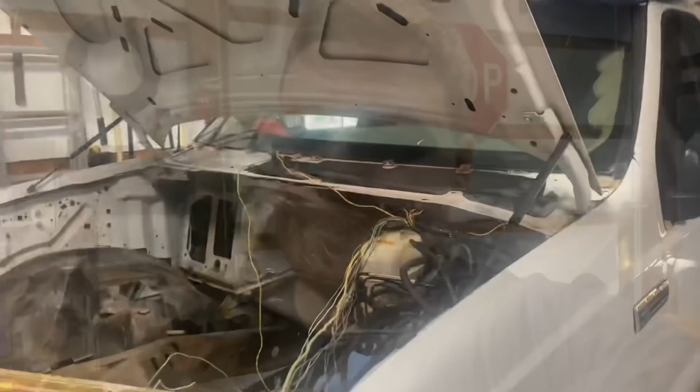Let's jump into it. So the race truck here, we're kind of prepping this thing, getting it ready for our engine, which is currently at CNC fabrication. You can see we've eliminated basically everything in the HVAC system, so your heater and AC, everything is eliminated over there. We're doing some wiring, eliminating a lot of the factory wiring needed for all that stuff, so we're going to have as little wiring as possible going across our header panel. I did make some small modifications up here to hopefully make it easier for engine removal and installation, not that we're going to be doing it a lot.

Inside of the truck, it's still the factory interior, but we did pull the dash off and got rid of all of our ductwork back here. And I think that was pretty much it. Back here we still need to do some work, this place is a mess. But you can see over here all of the components that we've deleted.

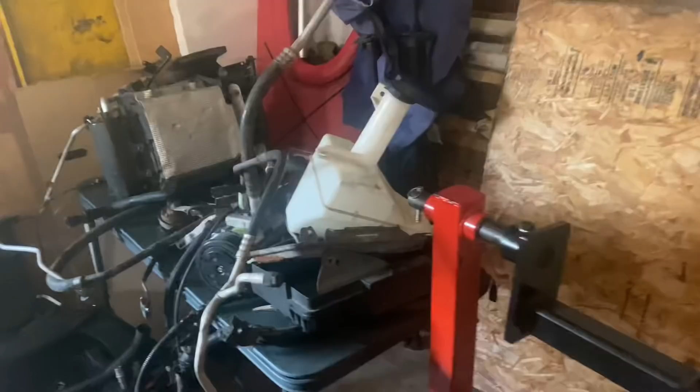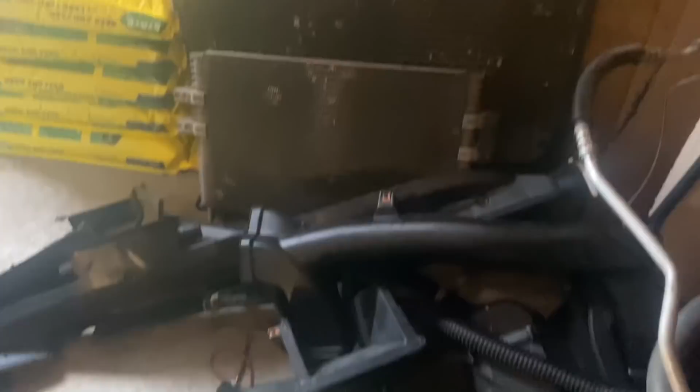Our windshield washer fluid, gone. See you later. There's our heater box right there. Here's all of our vents sitting behind our dash there. We've also got our AC condenser and our transmission cooler, because we're going to be going to a fan setup that's actually going to be in the back here, so we don't need all of that up front.

But guys, this is quite a bit of weight. There were some miscellaneous brackets that we were able to eliminate as well. Oh yeah, these puppies, gone. See you later, don't need those. Vacuum pump, not gonna need that. Whatever, but yeah, quite a bit of weight.

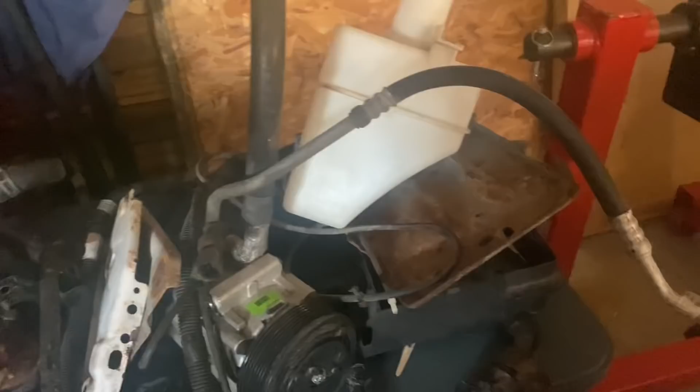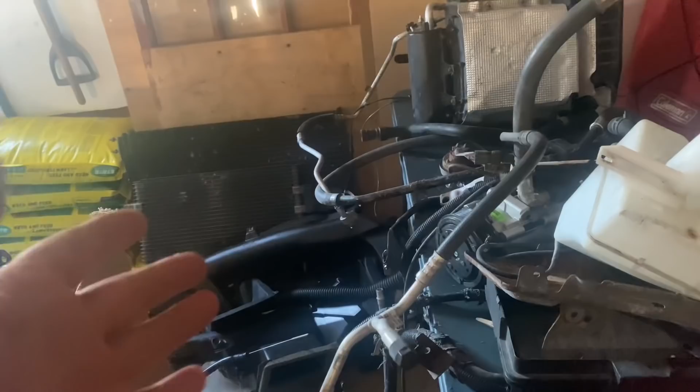We've got both battery boxes as well, those are removed because, again, we're moving our batteries to the back. We're trying to eliminate as much weight as possible, but stuff we need to keep, like our trans cooler, like our batteries, that weight we're going to try and move to the back of the truck, because obviously there's zero weight back here. So that's kind of the goal, at least moving a lot of the weight that's on the front end and getting it back here, while also eliminating weight along the way.

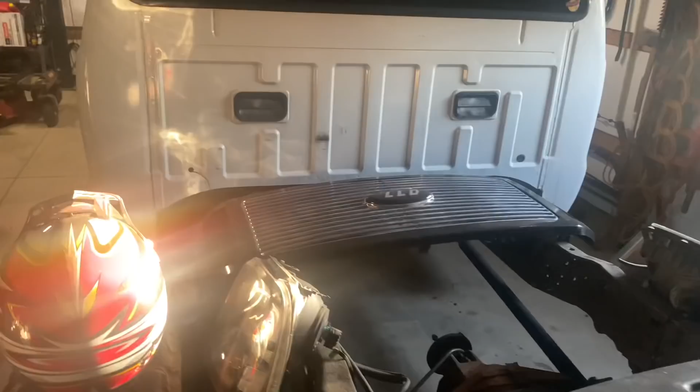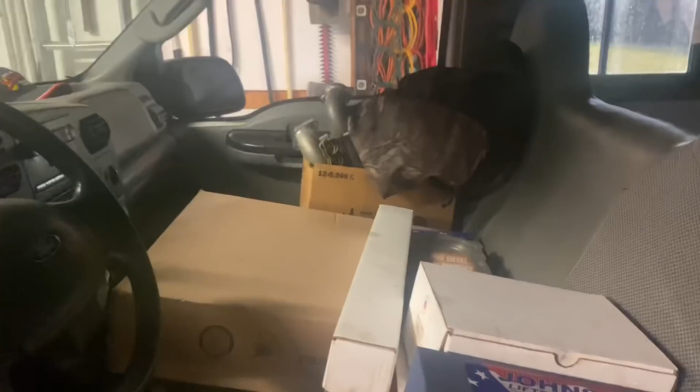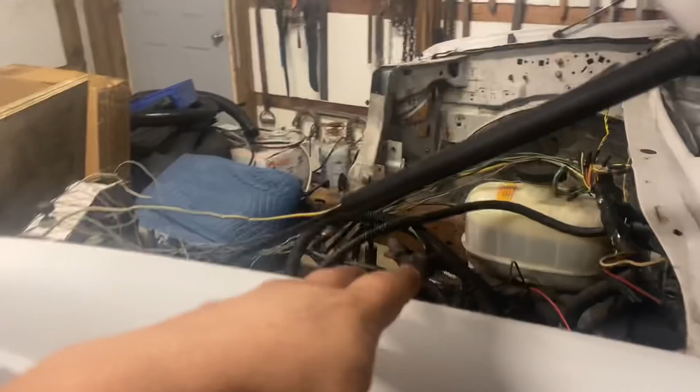So the goal here is to be under 5,000 pounds. Careful, whoa, hey, careful. So we're trying to keep the interior somewhat relatively stock. We're going to be going to racing seats in here, might do something with the steering wheel. I don't know how I feel about airbags just yet, but we might be eliminating the airbags as well. ABS, we're keeping. Like I said, not sure about the airbags yet. So a lot of this stuff over here is going to remain pretty much the same, but a lot of the weight came from that side of the vehicle.

So yeah, pretty gnarly. I didn't feel the need to pick up the camera and show you guys me just blowing this thing apart and ripping and tearing things out of the truck, so I just wanted to do a short update for that. We're getting really close, guys. You guys, oh my goodness.

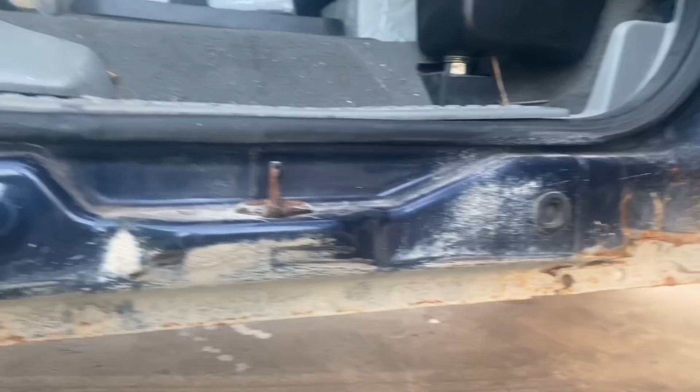Rust isn't terrible, but there's definitely some rust. Cab corners were cut out. It does have a rust-free Texas bed on it though.

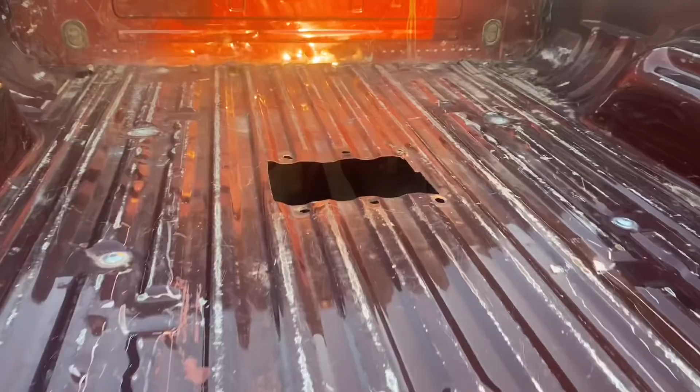Obviously it's the wrong color, so that's kind of nice. It's got a gooseneck plate. The bumper is actually in really good shape, just missing a couple of these plastics. So that's not too bad.

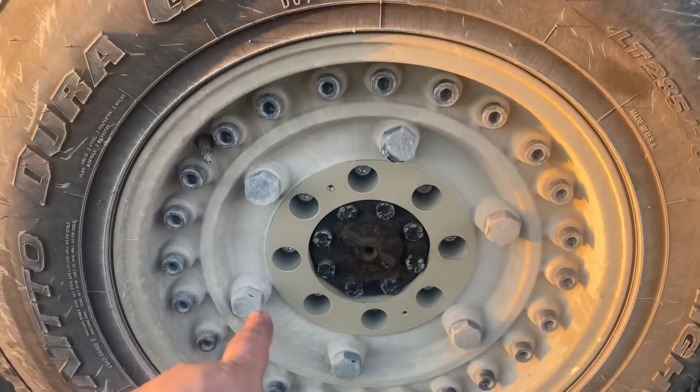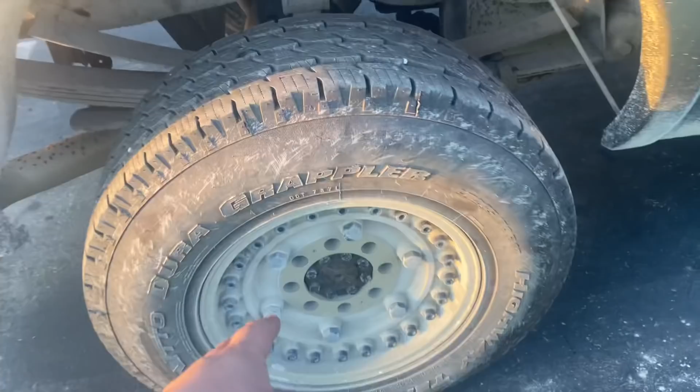The rims and tires are brand new, from Black Rhino wheels, and they're Nitto Dura Grappler highway terrain tires. Brand new rims and tires, this is like a $2,000 setup. This bed is like $2,500 here in Michigan. So that was pretty cool.

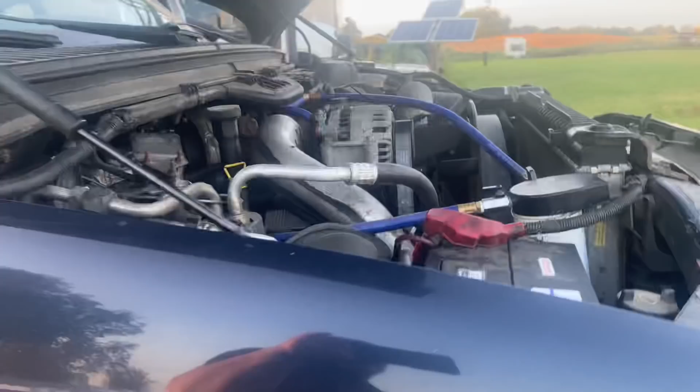It does have the lights and the mirrors. Here is underneath the hood. You can see he's got his coolant filter, that's routed all weird. And then it's missing this front plate here, or fan shroud portion right there. But it does have a coolant filter.

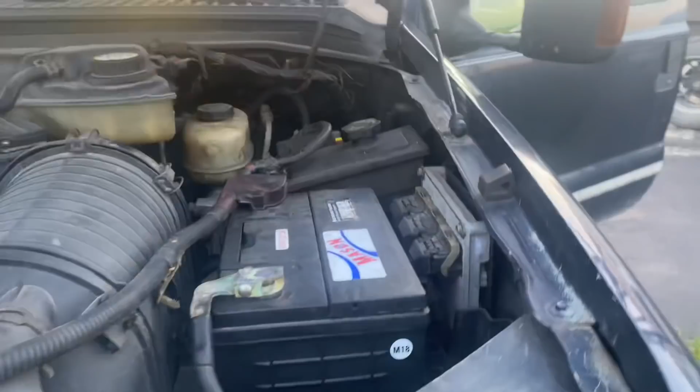We do seem to be losing coolant. We are also leaking oil, but if you look down there, that is a stud, so somebody did head studs in this. Look at that, nice bolt right where the filter minder goes.

'03. When we bought this truck, the guy told me that it did not run, which the batteries were dead. So I hauled it back to my place, and the first thing I had to do was put batteries in it just so I could check codes, see what was going on with it.

So we checked codes, we checked the oil level. There were two codes, one for a brake switch circuit fault, and then there was also a glow plug control module fault of some sort.

We put batteries in it, we cranked on it, and we watched oil rail pressure come up, and she came alive. Not sure what kind of issues he was having, but he said it died out on him going down the road, and then it wouldn't restart. But we haven't had any starting issues up to this point, the truck starts right up.

So there is the oil leak, and it does seem like it does crank for a minute longer than it should. So I don't know if it's losing oil pressure somewhere in the system. Obviously it's leaking down because it does take a minute for it to finally gain that high pressure oil.

One thing we did already do, we checked the fuel pressure in the truck, and it was like 45 psi. We ended up doing the fuel filters in the truck and redid the fuel pressure test and managed to gain 10 psi just by changing the fuel filters.

So a couple other little things. We did do rear brakes on the truck, so you can see we've got all new calipers, pads, and rotors in the rear here.

We had to make a little fix right there. They had the wrong fitting, so we had to make that repair. They also had the calipers on the wrong side, and they were both seized, so it was a nightmare. But we've got both of those on there now. Everything is new back here.

For the front end, we did 2 new wheel bearings up front and 2 new U-joints plus the associated seals. This wheel bearing was bad, so we got that swapped out with a new one. OEM U-joint, or Spicer U-joint, I should say. Get a good look at that.

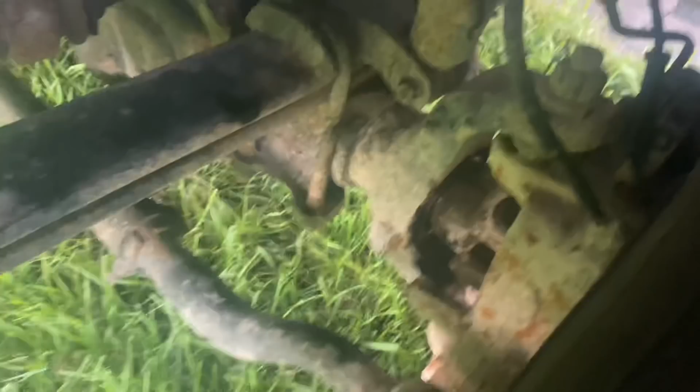Greased everything that's greasable on the steering components, and we checked out the ball joints. Ball joints are tight, so we didn't have to worry about anything like that.

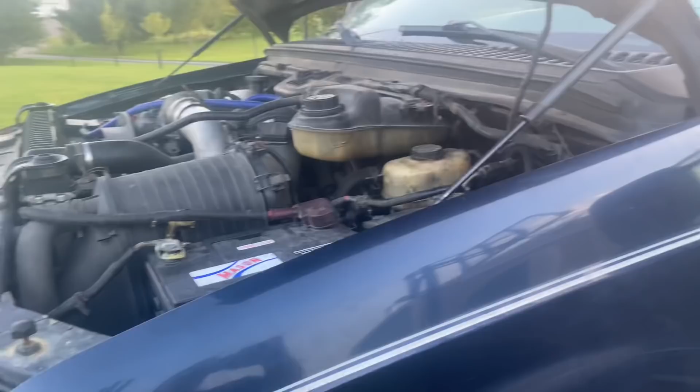So now that the truck is safe to drive, well, I think it's safe to drive, we are going to get IDS hooked up to her and see what we can diagnose.

So this is Ford IDS. What does that stand for? It stands for Integrated Diagnostic System. It is the program that Ford uses in order to be able to communicate with these trucks. It is the best of the best when it comes to trying to figure out what's up with these 6.0 Powerstrokes. We can manipulate sensors with this system.

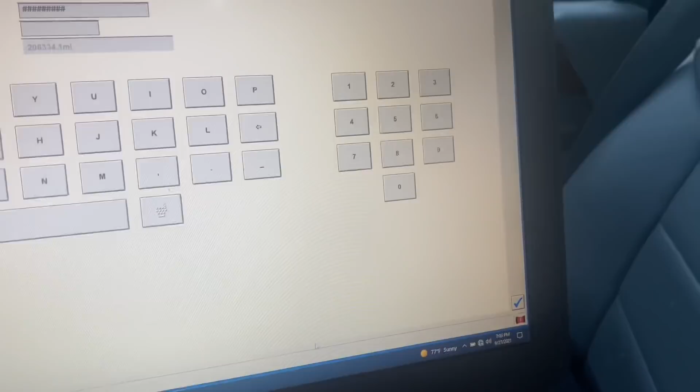For example, we can increase or decrease VGT. We can manipulate the IPR valve for different testing scenarios, which is really helpful if you're doing an air leak test.

We also have power balance on here and relative compression. Power balance gives us some information about the injectors. Relative compression gives us information on whether we have a low compression scenario on a specific cylinder.

So we're just going to do a quick self-test. We're going to check all of the DTCs and see what she comes up with. When I first bought the truck, we cleared all of the DTCs in the computer.

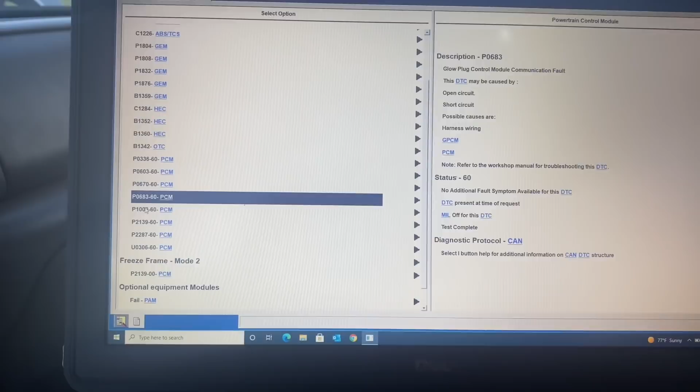So check this out. We've got a crank sensor code, that one's stupid, I wouldn't worry about that one. Glow plug module control circuit code. Glow plug control module communication fault. P1000, we don't care about that one.

Throttle pedal position sensor switch D/F voltage correlation. That's an interesting one. And then an ICP sensor circuit intermittent - yes, I like to see that. And then we've got a software incompatibility with FICM.

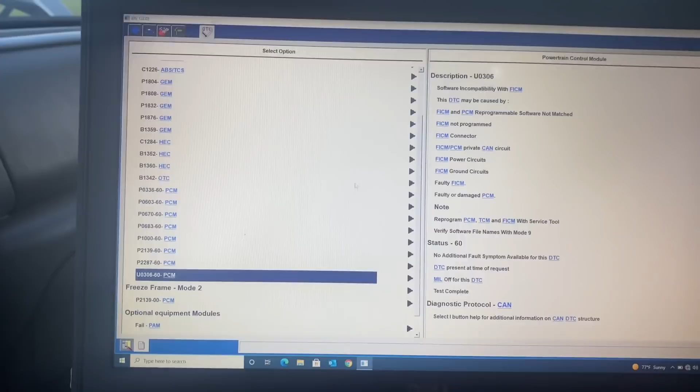This isn't a huge deal as far as this code goes. The 03 and 04 are a 7-pin, and then 04.5 and up go to just a 4-pin FICM. So most likely somebody replaced a FICM and went from a 7-pin to a 4-pin, and so it's going to throw this code.

It's a soft code, so you won't see this - your check engine light won't come on. But we can actually program the FICM with the Ford IDS here, so we might do that just to get rid of that.

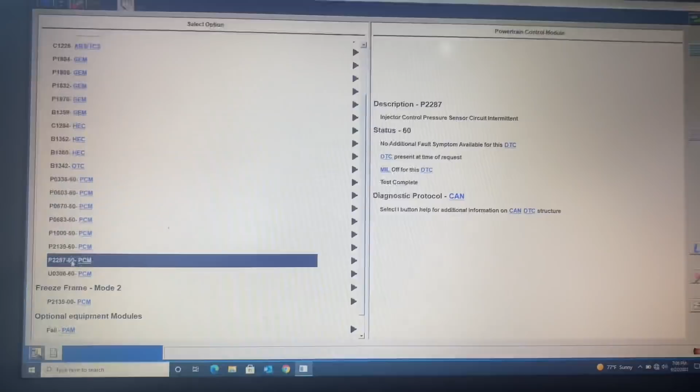But this one here, ICP sensor circuit intermittent, that's an interesting one. Most likely our ICP sensor has failed and is pushing oil through the sensor, which is giving us an intermittent signal issue or a circuit fault.

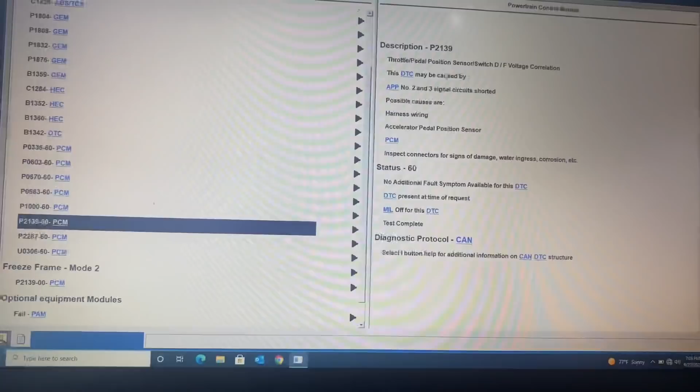This one's kind of interesting, I've come across this a couple of times. Most likely our throttle pedal is junk - switch D/F voltage correlation. So we might have to do some pinouts on that one, but most likely our throttle pedal down there, which is adjustable, is probably super expensive.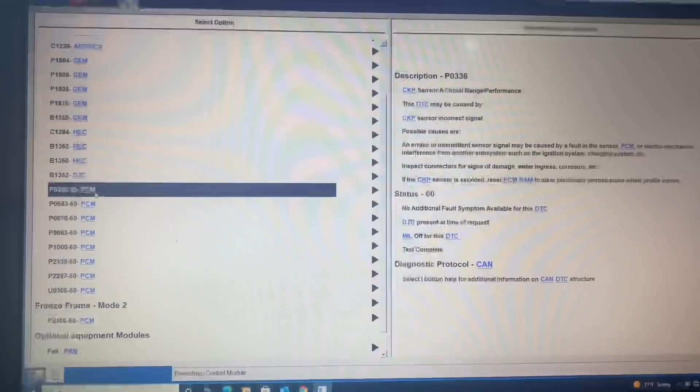And then our glow plug issue, most likely this is just a bad module. We will check the wiring though. Power, no, don't care about that one. And this is interesting though - sensor A circuit range performance.

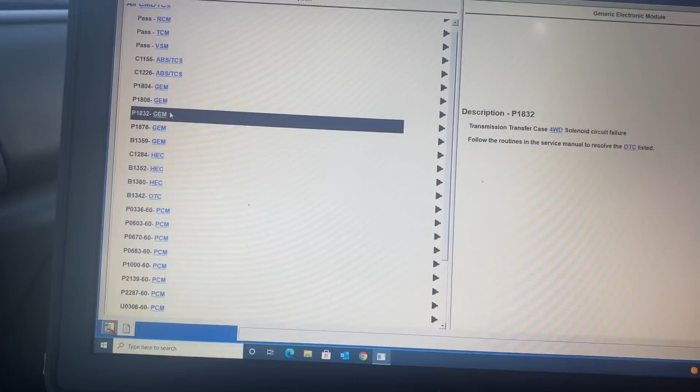So I don't usually look at all of this other stuff here. We can scroll up - left front, brake warning, GEM, 4-wheel drive high indicator circuit, 4-wheel drive low indicator circuit. Blah, blah, blah. Ooh, oil pressure switch failure.

This, I think, is part of our oil pressure issue. We're losing the low pressure oil side of things, and so it takes a minute for it to start, and so it ends up throwing this because it says check gauges on the cluster. Key ignition, don't care about those. ECU internal fault - look at that, wow.

So anyway, we're going to go ahead and clear these. We're just going to get them all out of here.

After clearing the codes, the glow plug module control circuit code came back, so we're going to have to do some pinout testing on that and see what we got going on there.

But now we're going to cruise over to our data logger, and I'm going to show you guys the PIDs that I normally like to run. Anytime you have a crank no-start scenario, these are the PIDs you want to monitor to see why it's not starting.

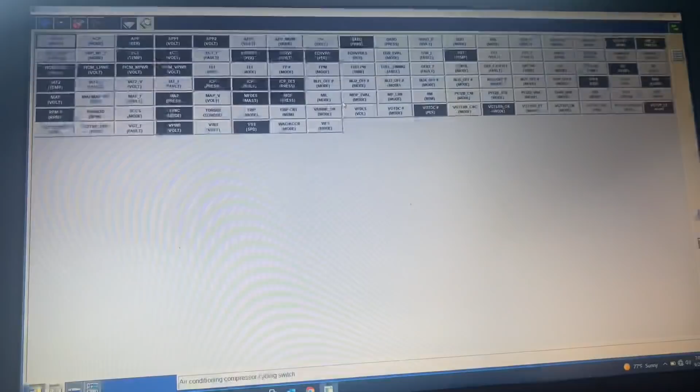Ford IDS can read any and every module that the computer can read. So I like to look at battery voltage because that's very important.

This one over here, CMP fault, that's your cam position sensor, so we want to see if there's a fault there.

Then we've got DTC numbers, so while we crank on it, we want to see if any DTCs pop up. We don't care about oil temp right now, we don't care about coolant temp. I select all 4 of these FICM ones.

Obviously we want 12 volts going in, we need to maintain 48 volts, and then we've also got FICM sync. So if we don't get FICM sync, the truck's not going to start.

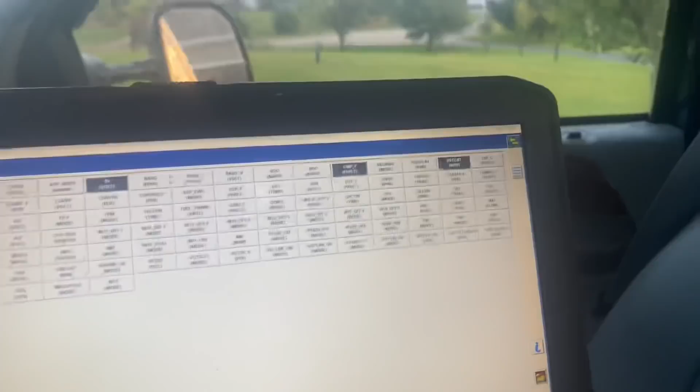And then I like to monitor IPR percentage right there, and we don't care about the injectors. I like to monitor ICP voltage, ICP pressure. We know we need 500 PSI to start, so I like to monitor that one.

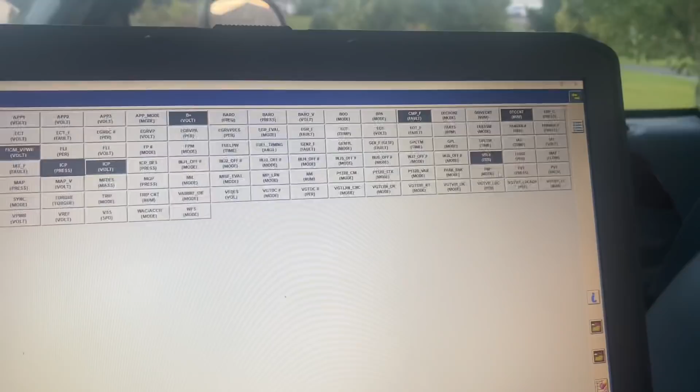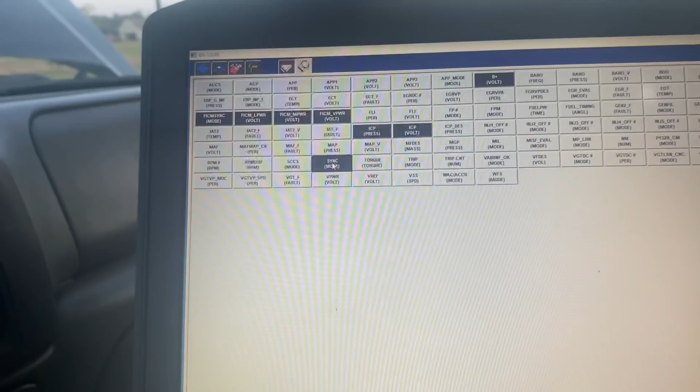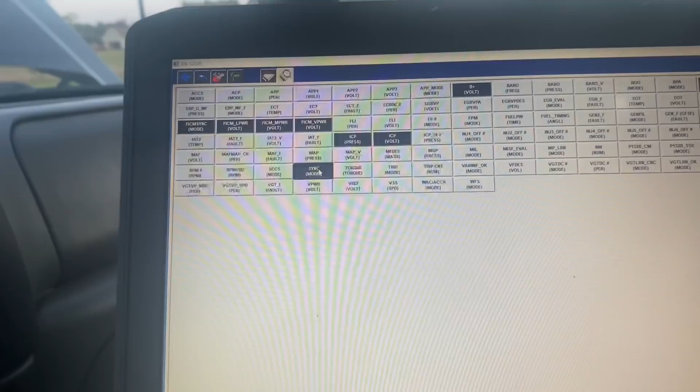Going through here, then we have sync right here. So sync, your normal sync before you have FICM sync, this is your cam and crank sensor. Your cam and crank sensor sync together to know which cylinder is at top dead center, and then that sends that information to the PCM. The PCM determines, the PCM will sync the FICM to know when to fire the injectors dependent on your cam and crank signal. So if you're not getting sync here, you're not going to get FICM sync.

So that's why I like to have that one selected. And we can know if we have a cam position sensor issue by having this one selected.

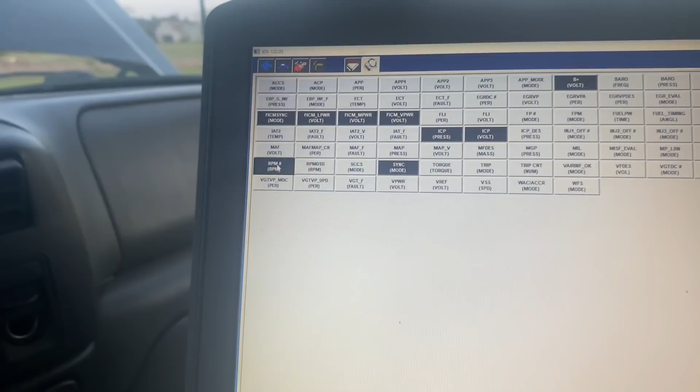The only other one you could select would be RPMs, which is over here. RPMs will tell you if you have a crank sensor issue potentially. You need 150 to 200 RPMs while cranking in order to get sync from your crank sensor. If you have less than that, the truck will not start. Your cam sensor up here, if that goes to a fault, then you will not get sync and the truck will not start.

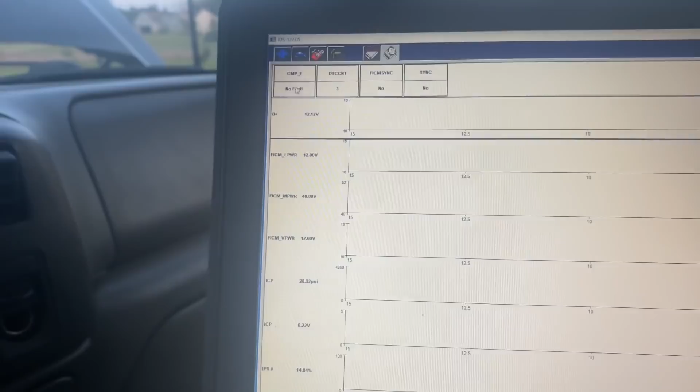So we can come down here, check that off. Now, before we even try to start the truck, a couple things we want to look for. Right up here we've got the CMP fault, we have no fault currently. That's good, we know what 3 codes we have, so that's no big deal.

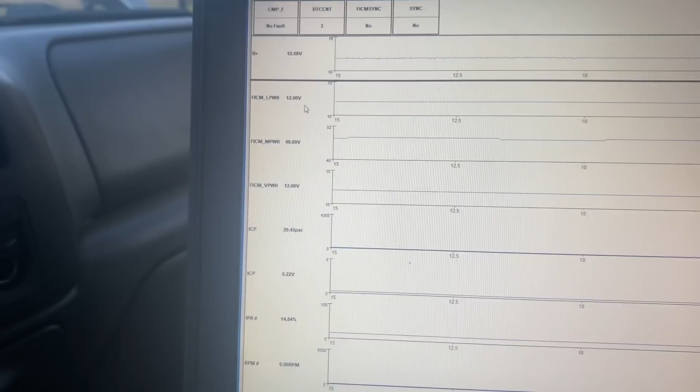FICM sync, we're not cranking on it so we're not going to have sync. And then this one, sync, not going to have it because we're not cranking on it yet. Battery voltage, 12 volts. FICM supply voltage, 12 volts, good. 48 volts coming in, supply voltage 12, good.

IPR percentage is going to say 14 because we're not cranking on it, and RPMs are 0. So we're going to start cranking on it, and she's going to start, hopefully. I'm just going to cycle the key, wait for the laptop to catch up, let our glow plugs go out, and crank on it.

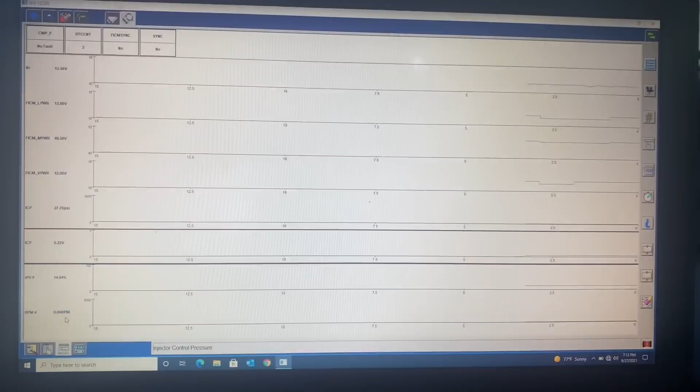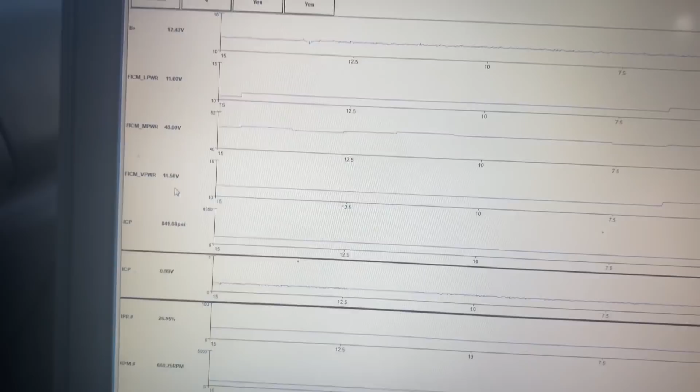So you saw, you guys can go back, but you saw we got sync, yes, no fault, battery voltage, FICM voltage, you can see our alternator hasn't kicked on yet, 48 volts, 48.750, good. ICP is sitting at 800. ICP voltage is good. IPR is like 26%, that's beautiful. And RPMs are like 600.

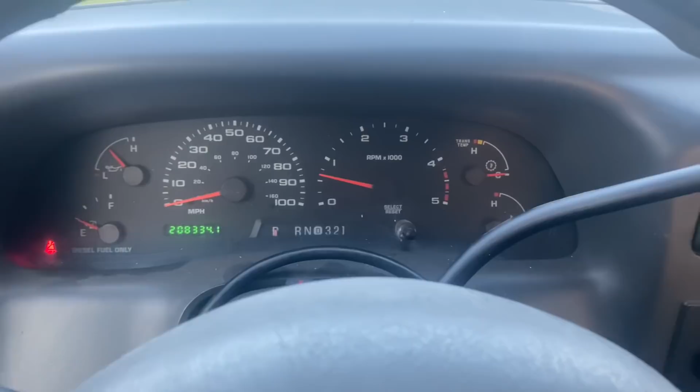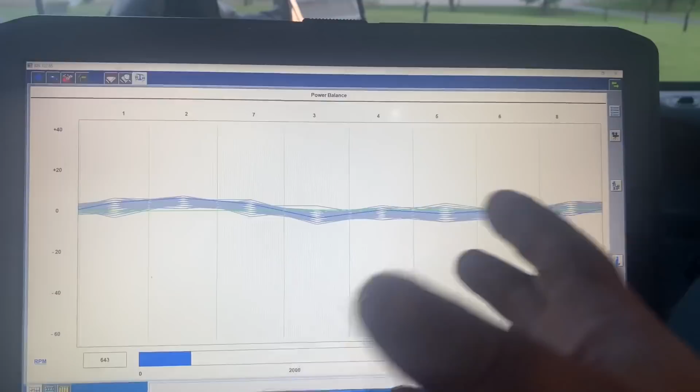Looking good. So now we are on the power balance, and power balance is going to show us the condition of the injectors. This is where each injector is going to compensate for each other. So if you have a weak injector, the other seven injectors are going to try and compensate for that injector.

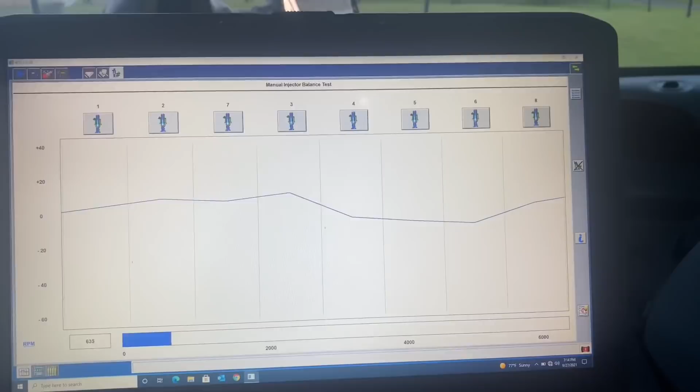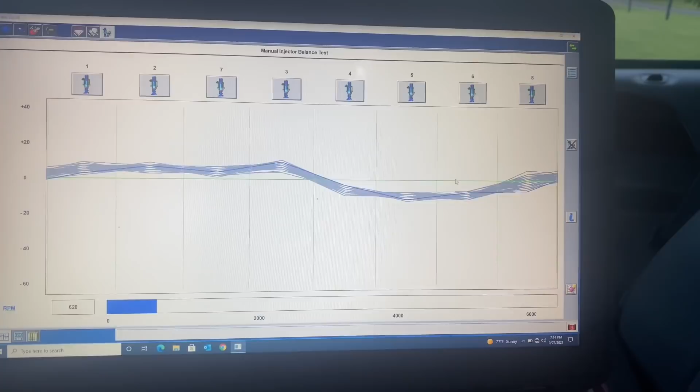So what's cool about IDS is you can take away compensation, and that will tell you where your weak injectors are. You can see this injector here, number 4, 5, and 6 are both below the normal threshold. This is the ideal threshold. If you are at this or slightly above it, see these ones are good, I'm not too worried about those. This one's getting dragged down because of number 6, but we probably have an issue at least on number 5 and number 6.

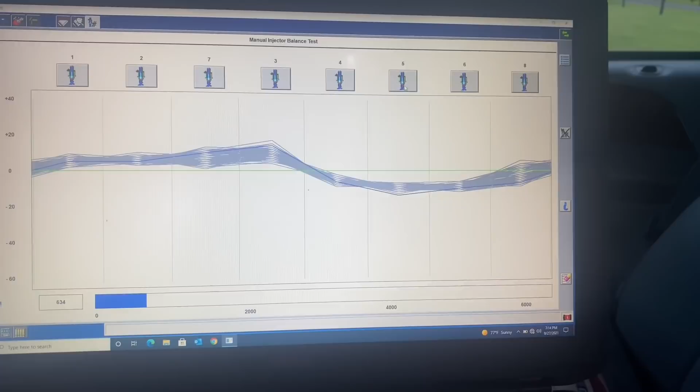So now I'm going to cut these out and we're going to see how the truck reacts. So you can hear it. Bring that one back. Cut this one out. Bring that one back.

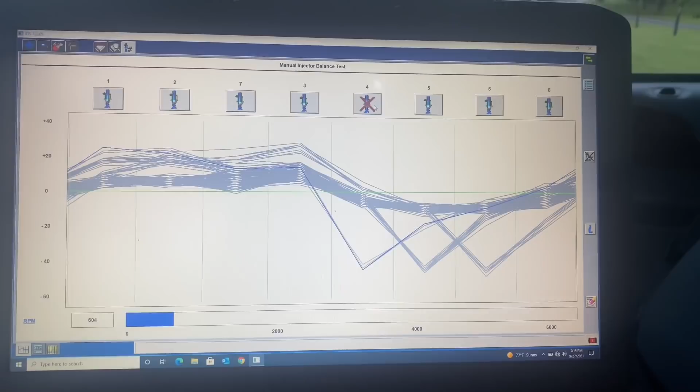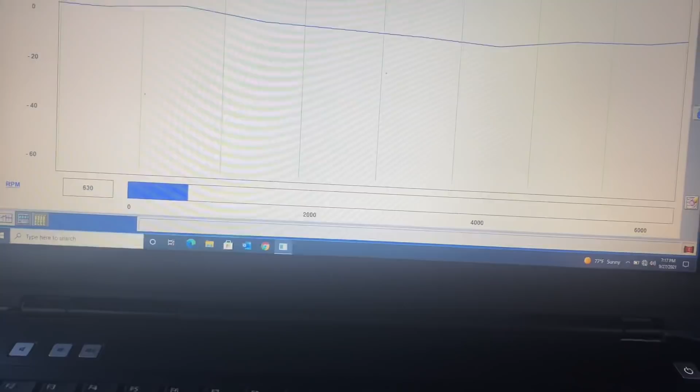See, so we have a noticeable difference when we cut those injectors out. So we know that they're working, we know that they're firing, they're currently not misfiring. Now supposedly these injectors were rebuilt. The guy didn't really have much information for me, so who knows if we can even really trust that. But we're gonna cruise over to a different test now.

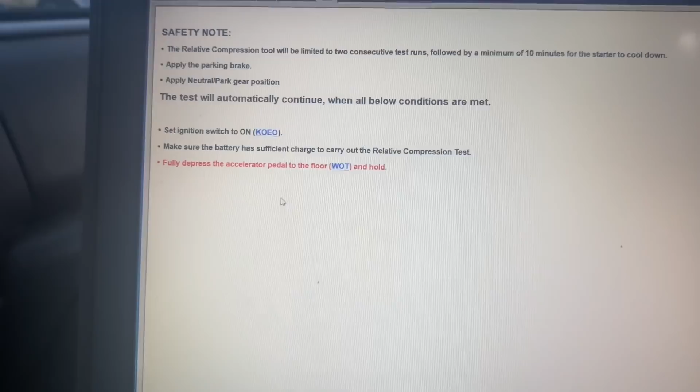We're gonna just go to relative compression, and this feature is really cool. I'm gonna shut the truck off, that's the first thing we're gonna do. Ignition on, fully depress the accelerator pedal to the floor, wide open throttle, and hold. So we're going to go all the way down, and then we're going to crank the engine for 10 seconds or until the test is complete.

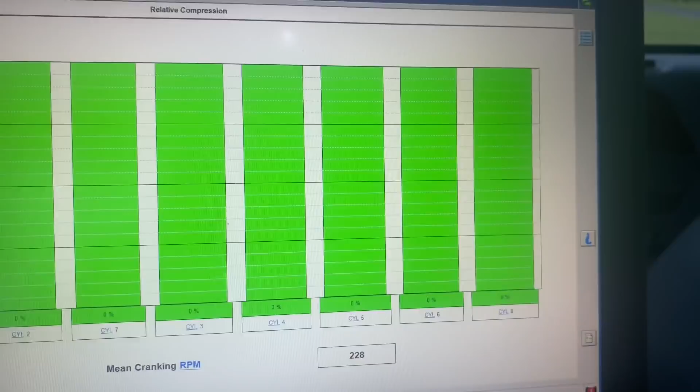And so you can see our cylinders are all 0%. So that is good. Generally, anything more than like 5% and you might have a problem. But everything looks good here. So we're gonna go back to our data logger.

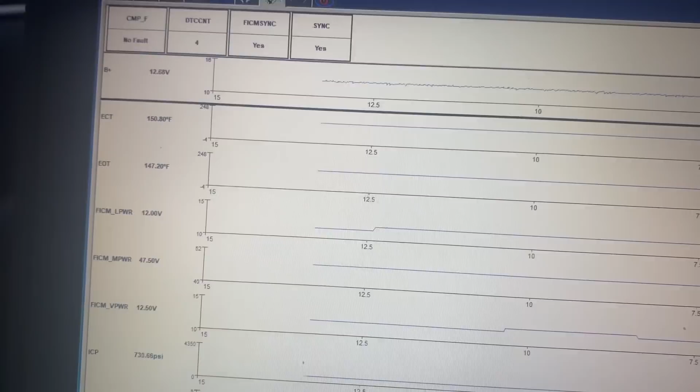All right, so we went for a little bit of a test drive. We got the truck somewhat warmed up. We're sitting at 147 oil temp, 150 coolant temp. I wanted to show you guys this. Go back to our power balance.

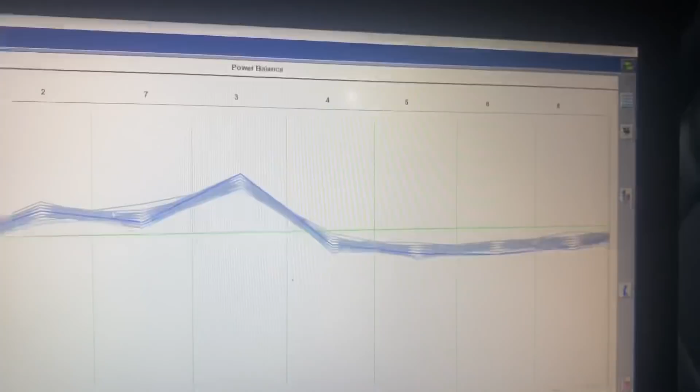So I'm pretty confident we're gonna have to do a set of injectors in this truck. I don't even have compensation taken away. Let's take compensation away, see if anything changes. Oh, look at that.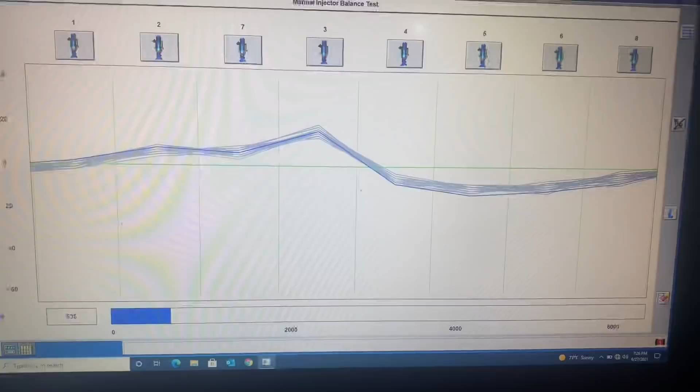Look at these 3, and you can feel this. You can feel this misfire across the board. See, so number 1 kind of came back now. But these ones, look at them, they're hit.

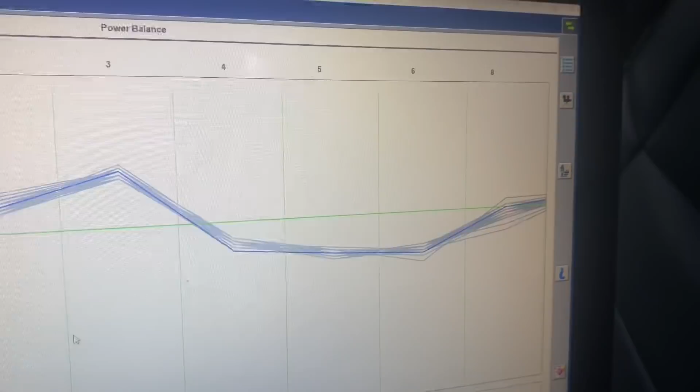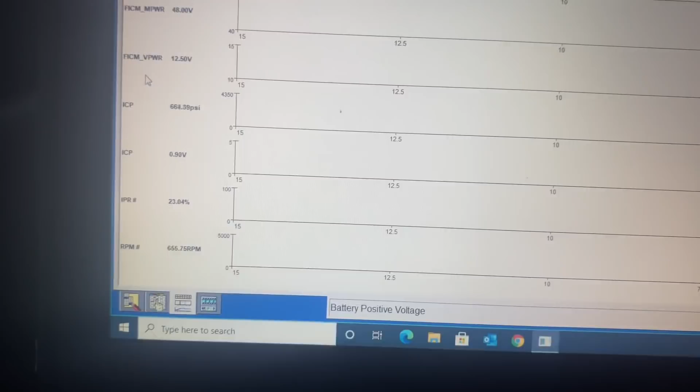And then I'm going to go back to the data logger. This is going to be really difficult to show you guys, but I want you to watch our ICP, our ICP voltage, and our IPR. Watch those 3, I'm going to try to keep them in camera view. We're going to get after it a little bit. A little bumpy here, hold on.

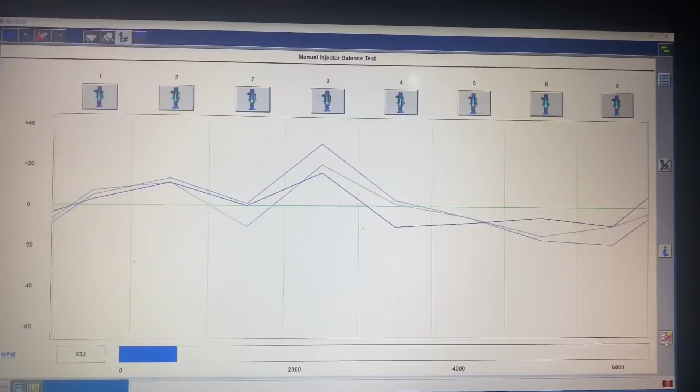We just came to a stop. Look at this power balance now. You can hear it, she's running like poo-poo, very abnormal. It's like just doing all sorts of weird stuff.

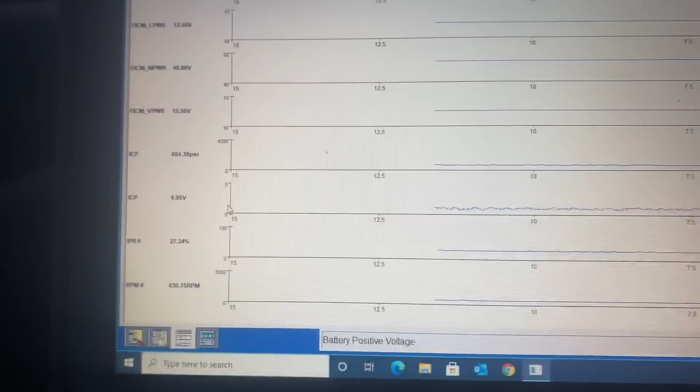Let's head over back to our data logger. You can see our IPR is kind of coming up a little bit, it's like 27. Our ICP is real jittery. Look at the voltage here. I mean, I feel like she's just barely running at 600.

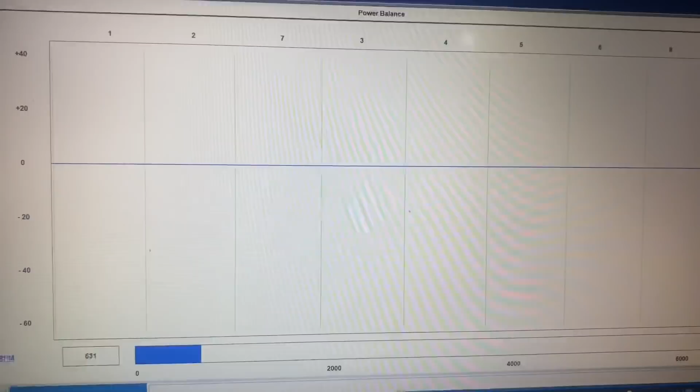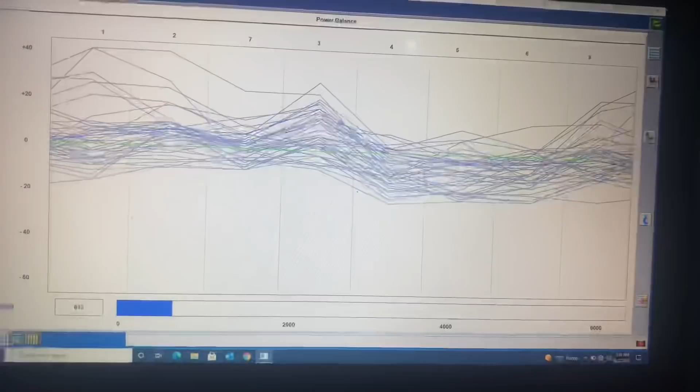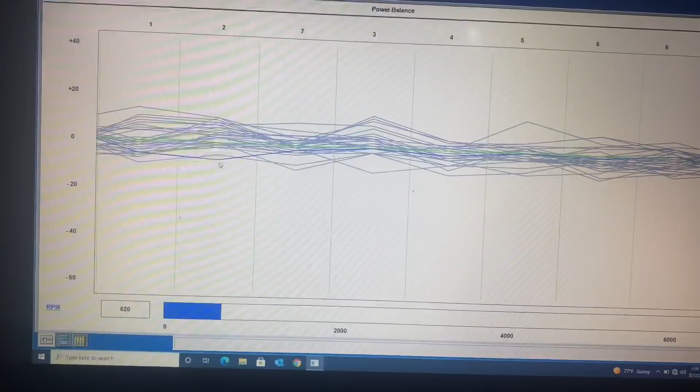She's in park now, you can see it cleaned up a little bit. I wonder if we've got an IPR issue. I mean, for sure we've got an ICP issue, which might be messing with our IPR.

So I don't know if this could be a high pressure pump issue. My guess is we've got an ICP that has failed. It's probably pushing so much oil through the sensor, it's not even funny. So that is going to be our next task.

We're going to have to rip this thing apart. It does have the full intake manifold, so it's got the piece that goes across the back, which sucks, but we'll deal with it. We'll get that ICP sensor out of there, we'll get the IPR out, and just check those things out and see how they look. I'm betting we're going to need a sensor and a pigtail, possibly an IPR.

So you guys are going to have to stay tuned for that. But that's going to be what's rolling out over the course of the next few weeks here. This is the new project. We're going to be tearing into it and seeing what we can find.